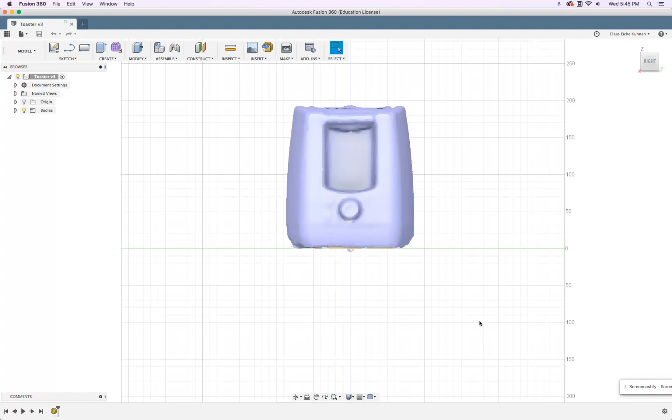In this project, I will show you the steps we can take to rebuild this kitchen toaster. We will take a look at the best strategies to create the individual sides, and then also the details like the opening, the push button, and the dial.

So let's get started. Step number one is, well, we need to figure out what would be the best strategy. Can we loft this one? Can we extrude this one? This is a nice study case to show you a different approach. We will create all the 6 different faces and then create the inner volume. Sounds abstract, I agree. Let's get to it.

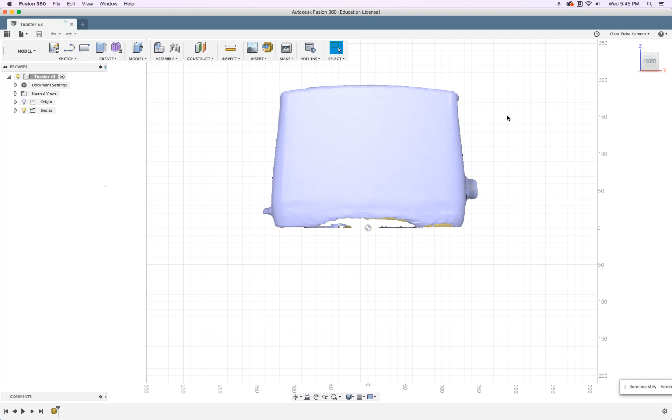We'll start with the front view. This is the easiest one. We'll create a sketch on this plane.

I'm also simplifying this design just a little bit. So from up here, I draw a line, maybe till, let's say, there. That looks good to me. And then I would like to add an arc, and I make the arc a little bit bigger, and the arc is also tangent to that line.

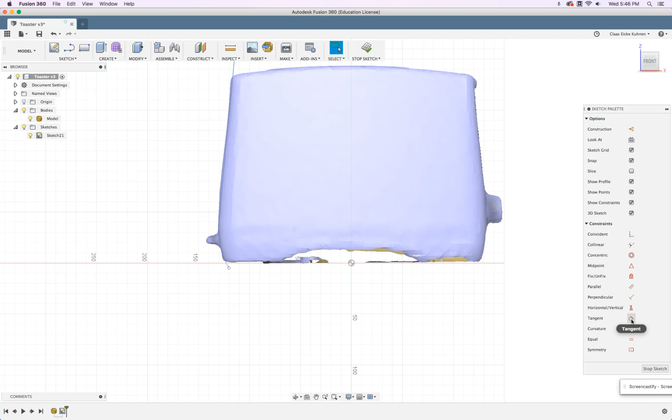In case you do not see that tangency, go to the sketch palette and create the tangency.

With the top point here, we can move this around. Here we can move this around. And you see, once we do everything, the modification of the sketch can be a little bit tricky, so just be mindful with it. But this looks pretty good.

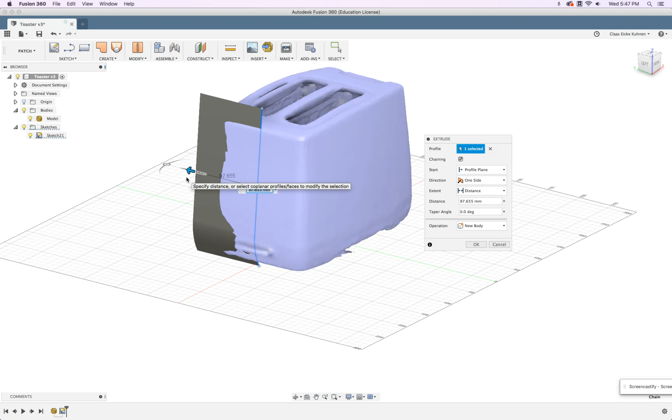Click Stop Sketch. And if we now go to Patch Mode and extrude the sketch, I have chain select, so both the line and the arc are being selected. I can extrude one side and I can extrude also to the other side. And you see that I made each side pretty big, and that's actually on purpose. I overbuilt.

Okay, so with this one surface done, I don't have to create the sketch on the other side and then extrude it. I can simply go to Create, Mirror, select bodies as the type. This is the body, this is the mirror plane. Along this one, click OK.

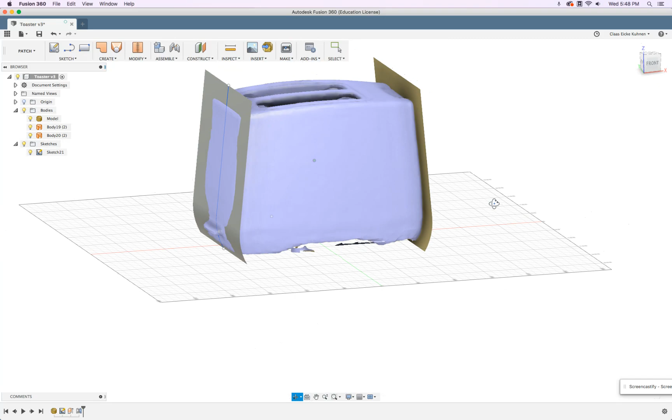Very good. Now I can see here I'm a little bit off, so maybe I have to move the toaster a little bit to the left. So let's do this. Here I go Edit, and then I will select Move, Body, select this one, and then just very gentle nudge it over, and I try to see how each surface there sticks through. Click OK. Click Finish.

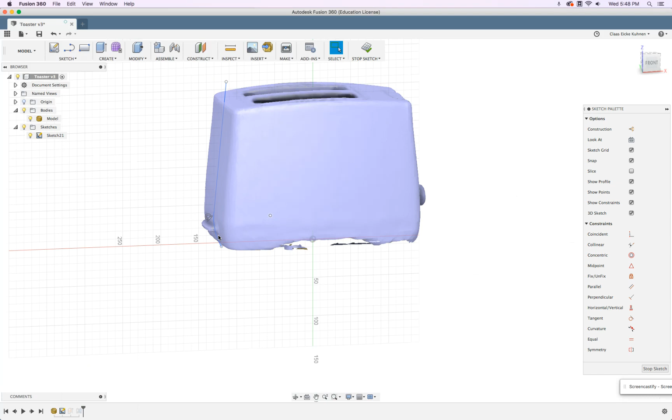And this is already a little bit better, which now means I can adjust my sketch. I select both elements, the line and the arc, press M, and then very gently move this to the left, click OK, and stop sketch. And now the surfaces, yeah, they're much better. Very good.

To help me navigating my scene, I'm going to hide these two bodies. Then I will create a new sketch on this plane. In case also sometimes you don't see these planes via origin, we can turn them on and off. And I would like now to create an element there too.

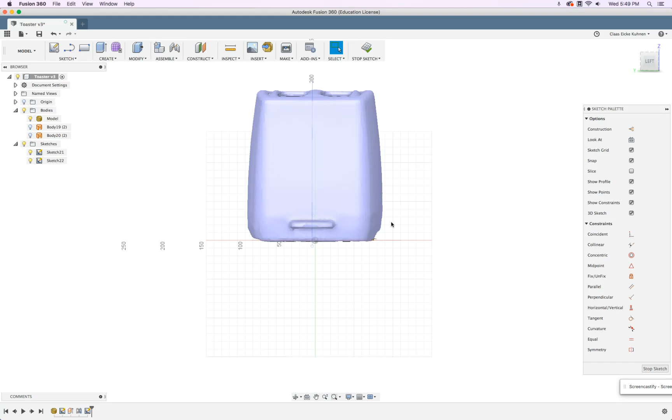So you see this is not a line, but it's slightly arced. And then here we have that arc. I want this arc point to be also in this sketch, so these, from both sides, these arcs start at the same position. So I will project maybe the top and the bottom, and also here, this top point. Okay, very good. Because now I have the height position, the length for the line, the length for the arc.

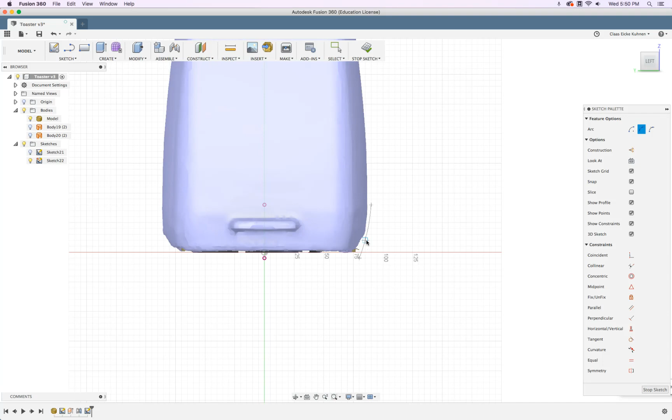Then sketch 21, in my case, I can turn off, go to the left view, and here I will just draw myself preemptively an arc, and then here I will create a spline. Okay, the arc and the spline should be tangent there, and then we have to adjust the height positions.

There, you see we have the horizontal constraint. This is all set, very nice. Now we can move these elements slightly in. I have this snap to grid turned on, so I will turn this off. There. What's the radius here? 142, it looks. Okay, very good. Okay, nice.

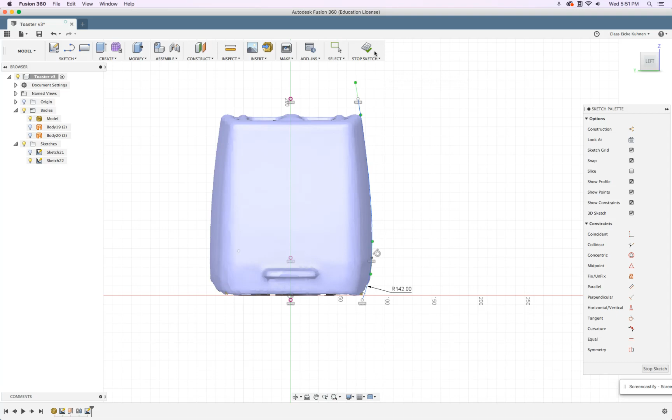Now with this done, I would like to create the surface, but as you can see, while this is kind of flat, this, or better seen from the top, this is arced. So, how do we do this?

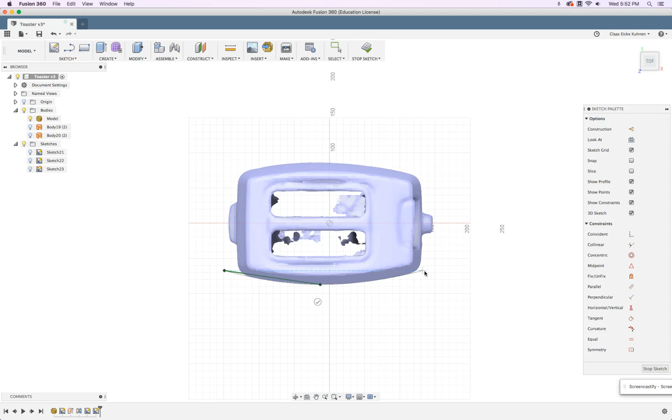I will do the following. I will create a new sketch. Somewhere just on the ground, go to a top view. That's good. I can hide these two. Then I select the spline command, click somewhere, click somewhere, click somewhere. Whoa, why did this? Oh, there it is. As you can see, the sides are slightly different.

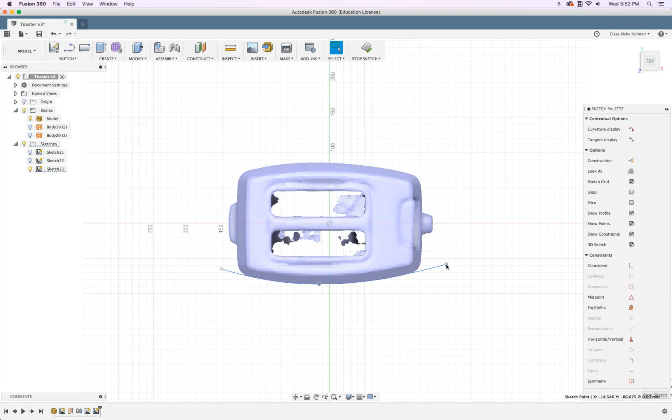So I can just draw actually the spline and then position these points as needed. There, very good. So this is actually the path or the rail I will sweep this along. See, they also don't touch each other. That's not a big deal. Go to patch. We go to sweep and say these two lines sweep along this path. Very good.

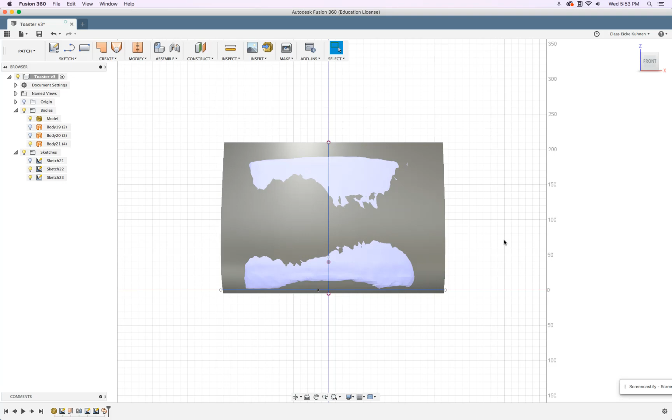Let's take a look from the front. You see top and bottom are nice horizontal lines. These vertical lines are slightly arced. That makes sense because you can see how this is angled.

Also here now we do a mirror again, so this we mirror along this face. There we are. So left and right and front and back, we have the surfaces, just not the top and the bottom.

So it's up to you now how we want to structure this. Let's say we call this left, and then this is front. This is actually front sweep path.

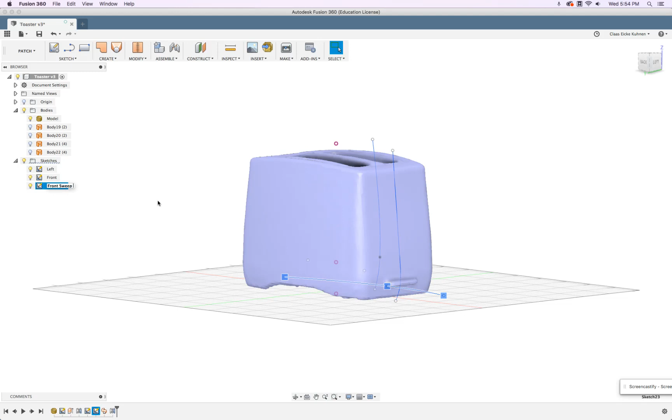I could create a new sketch and then add these elements in, or put this into the left. In the previous project, I mentioned try not to have too many sketches because then things can get confusing. In this case, however, I will separate everything into individual sketches, so it is easier for me to navigate. So I turn those off, make a new sketch.

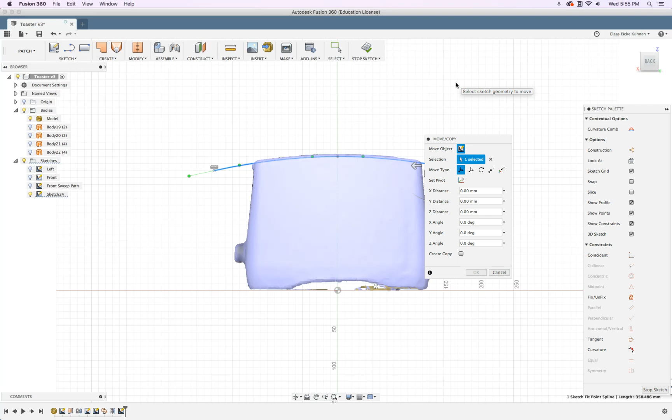Here I will create a nice big spline. Let's say these 2 points I would like to be horizontal. I can use the grid to snap this to the grid if I want to. And let's see, when I bring this one up or down, I can select the whole thing with M, move it a little bit up. I'm trying to find that arc.

Very good. If I want things to be more symmetrical, it's a little trick. I draw a line from the midpoint of my sketch down. Again, I press the L key to draw this line. Escape, select the line, press X, so it's a construction line. That helps me.

This midpoint I want to be vertically aligned. And then I click symmetry, this point to this point, be symmetrical along this line. There, escape. And there you see now how this line deforms. Very even. Now this is a perfect centered arc.

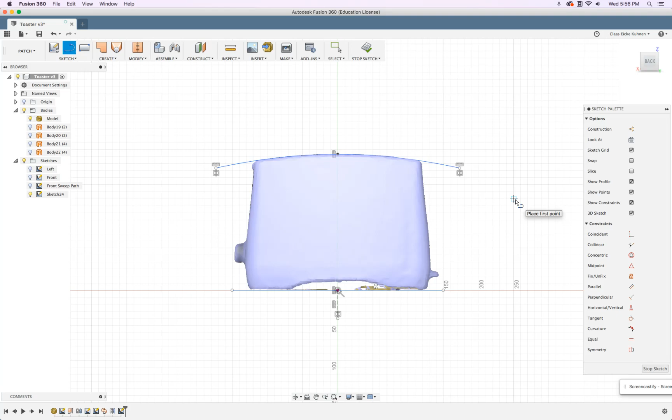Here we have another arc. I will, for the moment, ignore this arc. So I just draw a long line, and then later we will come back to that particular detail. Okay, so click stop, click the lines.

Then let's extrude these out, also here symmetrical. And when I rotate around, I make sure that all surfaces are somewhat intersecting each other, so there's no gap, which we have.

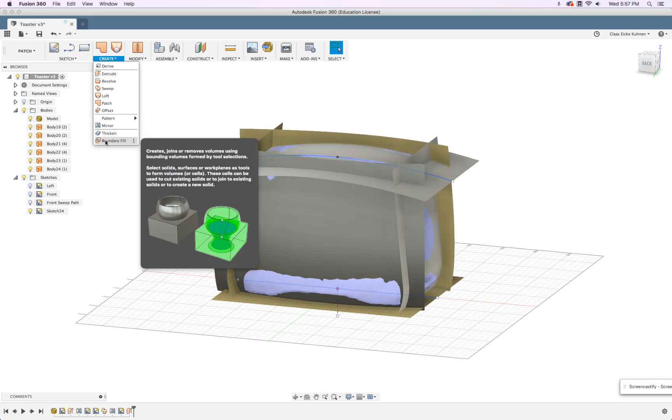Perfect. Click OK. Now, new introduction to a tool, boundary fill. So with the boundary fill, you can select multiple surfaces, and then it will keep the surface or the volume of the inside. That's the reason why it's called a boundary fill, because all these 6 surfaces create a boundary. So select that tool, then we select all 6 faces.

When done correctly, you should see this green thing pop up. Click select for the cell. That's the cell we want. Clip. Oh, did they add it? Remove tools. Click OK.

Finally, they did it. I complained about this a lot in the past when not having this option. Now we had the volume and all these surfaces, and now I needed to remove all these surfaces, which we can do, but then we have these entries here, which is terrible. So let's undo this and edit feature again, remove tools. Thank you, Autodesk.

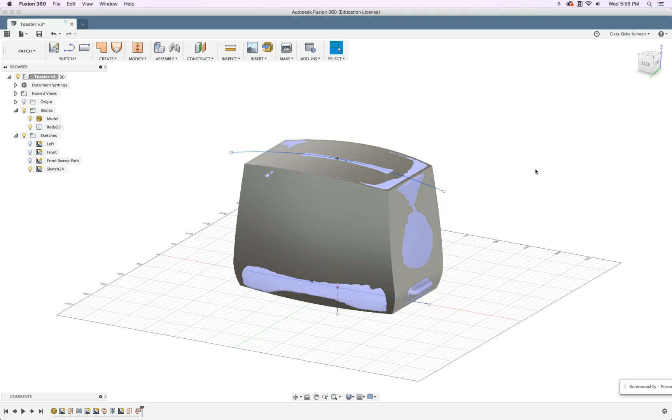That looks pretty good, don't you think so? So we have a nice flow. The cool thing is at this point we have a mass volume. So if I move this one down or bring this up, you see we can very quickly adjust the design.

So this maybe we can call top bottom trim. That all makes sense, very good. So what do we do next? At this point, maybe we could think about the edge rounding for a moment.

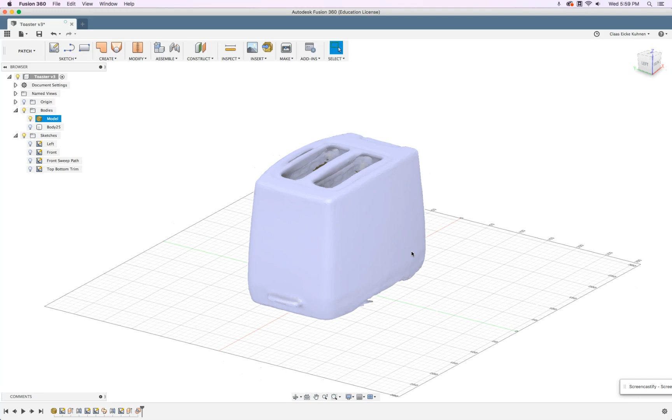If I zoom in, you will see that this is slightly rounded. This is more rounded. There's a particular fillet tool. Sorry, not fillet tool, fillet option. Click fillet, select this edge, and then instead of constant, we select variable radius.

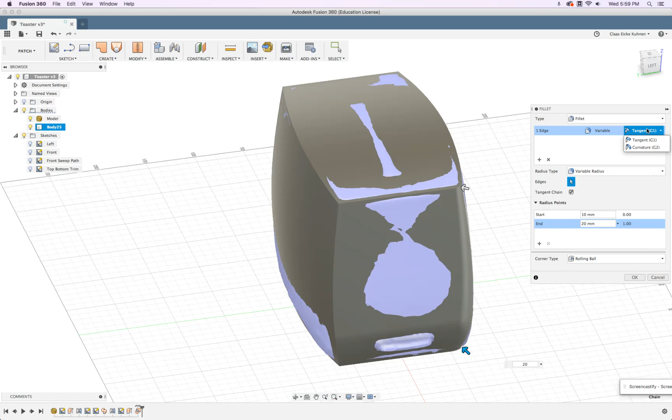Now we see now 2 arrows. Let's move this one in a little bit and move this in a little bit. So here maybe 10, and for the other one, and say OK. Good. Now we have to do the same on the other 3 edges.

Now I have to memorize 10 and 20. Well, what happens if this one edge we want to adjust, then we have to adjust the other 3 edges. So let's go to change parameters. This is kind of like a spreadsheet that shows all the different commands or features we are capturing. And there's the fillet 20. So this one, see fillet 20.

Start radius D114, 10, and radius D115. And radius D bottom. We can actually give those names. Click OK.

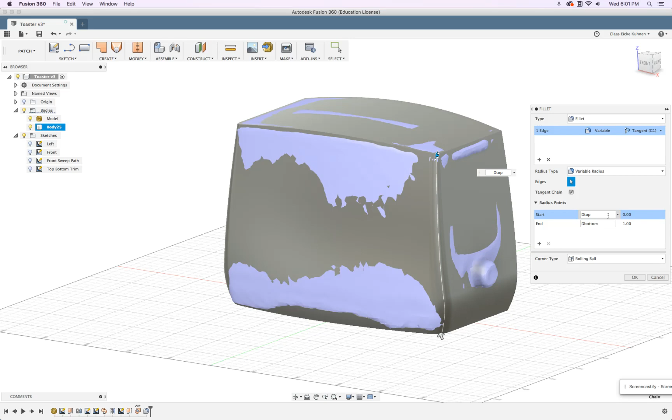Now let's go back to fillet, select this edge, variable radius. The end is actually the bottom, and this is the top. But by typing in the name, it copies that value from the spreadsheet. So here again, this is now start, and here this is actually the top, so I have to be careful. There, this is the bottom.

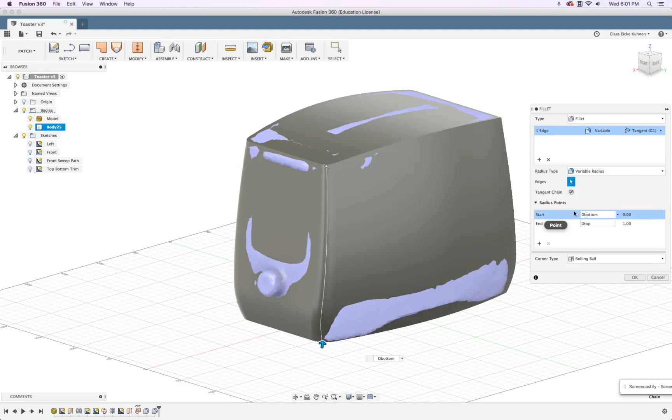Okay, let's do this one more time. So pay attention to the color of the arrow that tells you which one we are working on. So the bottom, and this, you see when I click into this, this arrow lights up. This is the top. Very good.

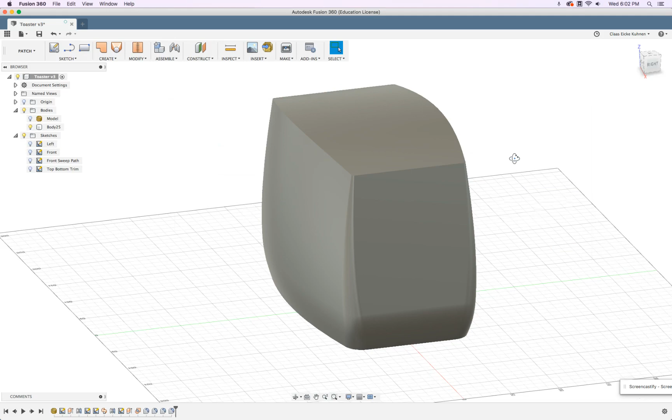There, very nice. So if we now go back to the first fillet, or we could even go to change parameters and say this one here be 3. Click OK. Now you see all edges have the radius of 3 at the top. 10.

Much better. Okay, but is that really 10? I don't know. Let's maybe make this 15. So this one I make 15 and 25. Okay, very good.

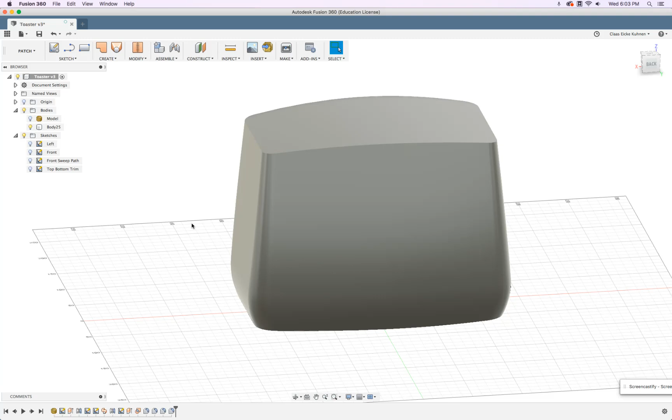I did not assign a G2 fillet yet. G2 takes more computational power, so for the moment I just simply leave G1. That will run faster. Let's go back to fillet, select this one.

Here we might say constant radius and 10. Okay, because this one I made 15, now I can make this 10. I can't make this 15 or 20 because then the radius would get too big.

You can see that this, where my mouse is, this arc is getting smaller. So this is 15, and then with this edge 10, the result here will be a really tiny one. If I set this to 15, see there, this is like super tight. This looks terrible. If we go to 25, we have like a corner point, so this is even worse. So let's go with 5 or 10.

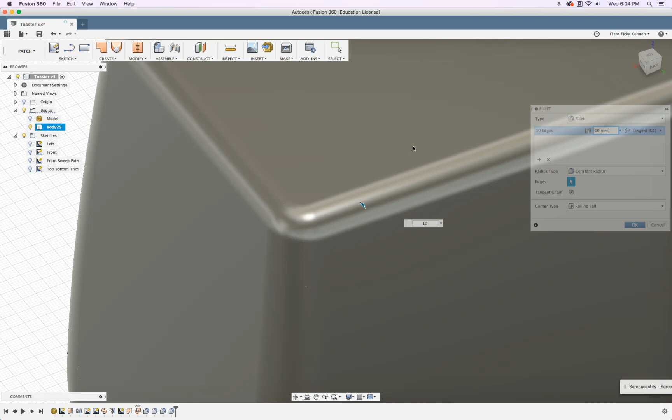Okay, nice. Let's maybe turn on this so we see the edges, how everything looks pretty clean. Very good.

Now it's time to create actually, let's start with something simple, the dial. So how do we create the dial? It's a horizontal cylinder. More or less, it's actually a revolve object.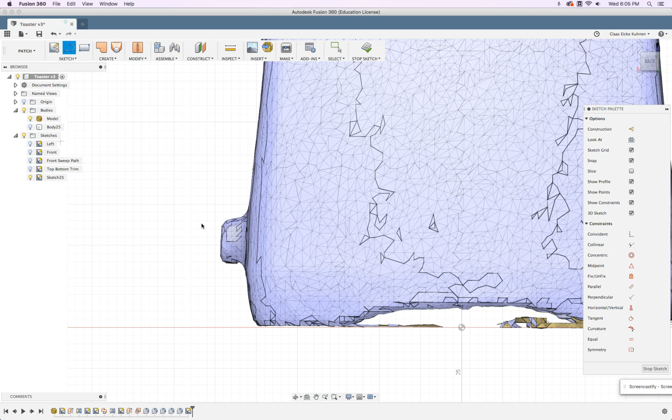So I could make myself here a new sketch, and then say when this is a line, so I try to find the height at the top and the bottom point. Where is my midpoint? There. Let's go inwards. Okay, a little bit up, a little bit down. And then move this one to there. Let's move this one to there. And there's actually our dial.

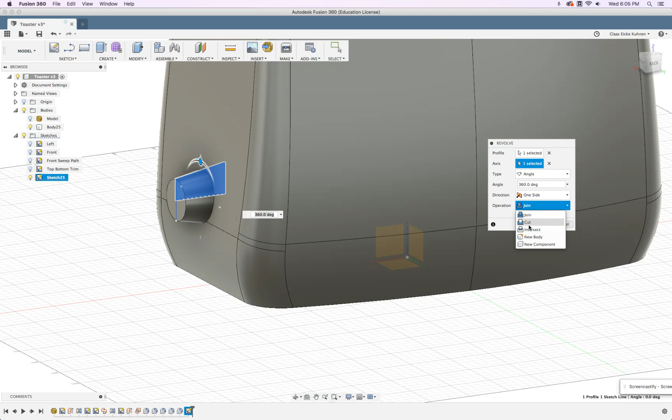Very good. Okay, now that's a revolve object. And revolve this one. Whoops. Along this edge. Not cut, not join. We want this to be a new body. Okay.

And let me actually grab the toaster for a second. Okay, and the inside is arced. Good, inside is arced, so this is actually not flat, it's slightly domed. So that means we have to go back and adjust our sketch here.

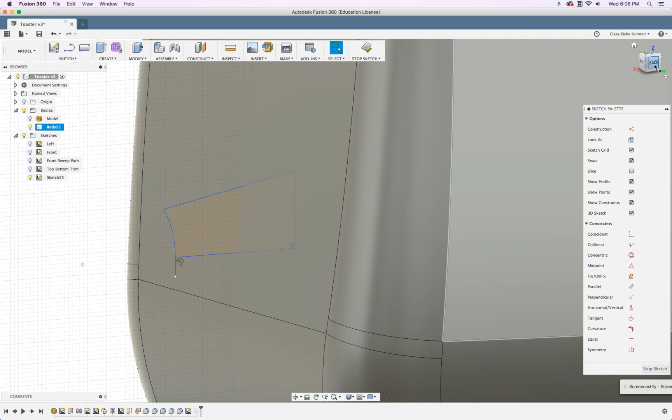This line I will select and delete. Then I will draw a line down. Okay. And this one I might bring over to there. And then I will create an arc from there to there and make this, as you can see, tangent to this line. So let me bring this a little bit to there so it's not so extreme. Very good. Stop sketch. Ah, there we are.

Very nice. Then we can fillet this a little bit. Very nice. And then we also have a little extrusion there, a little hollow. Okay, good.

So what did I mean there with a little bit of a detail? Let's rename this button revolve or dial there. And...

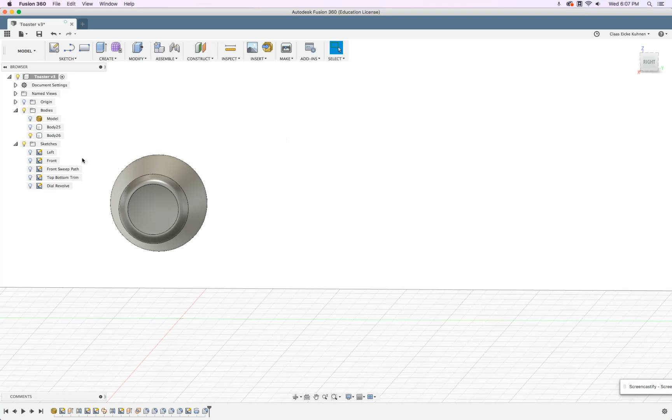For setting the temperature, you need to have some sort of a marker somewhere. So something either we cut out or we add to it, and they actually have something added to it. So we can do kind of like the same.

There, okay, good. So give me one second, I want to double check something. Okay.

So you see this up here is a longer edge, this is a smaller edge. So we can only design this detail as long as it is here. So it will sit actually on there.

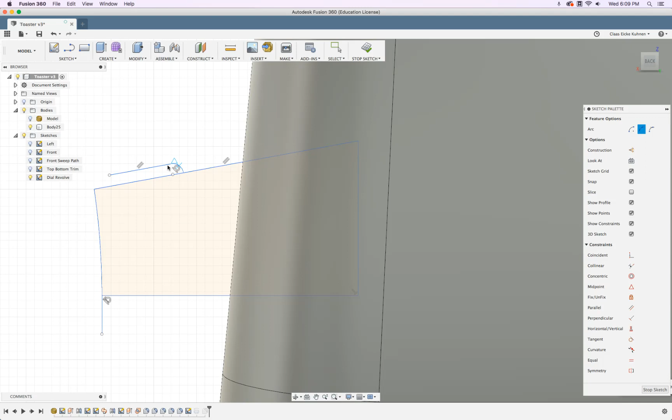We can put this detail into the dial sketch. Let's go edit sketch there. I will create a line, make it parallel to this line, and then create an arc, tangent. Move my mouse down. Yep, that should be good.

Stop sketch. Now I have to move this arc more to there. There are some issues happening. You'll notice by dragging stuff, my sketch got corrupted.

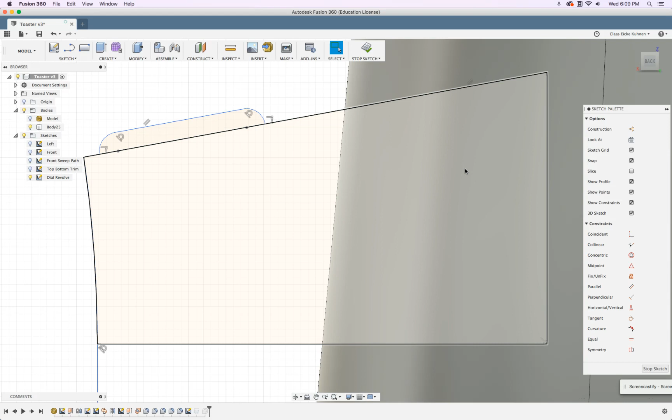Let's go back to edit sketch. This line I fix now, so it can't move anymore. This arc I move onto the green line, you see there's a blue cross. I do the same, or via a coincident constraint I can do this. So I'm creating a coincident constraint, which means this arc's center dot got glued onto this line. Now I can slide it up and down. It makes it a lot easier.

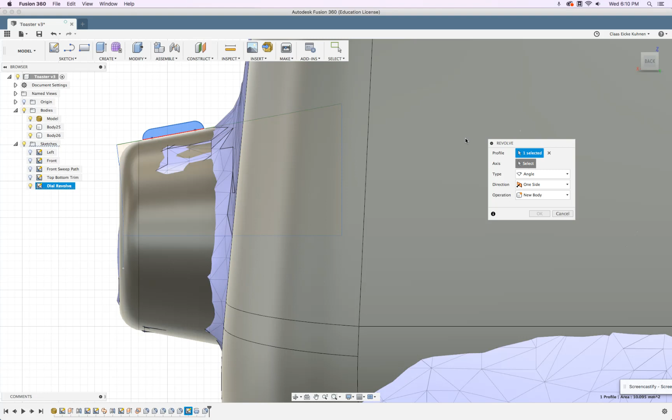So this one here I just bring to there. Good. Now I can move my mouse down, so it won't collide with there. We can now do a revolve, this one along this axis, and in this case now we join this. See? Now we have a small finger element that will help us understand where the temperature element is. Very good. So that was kind of like the element for the dial.

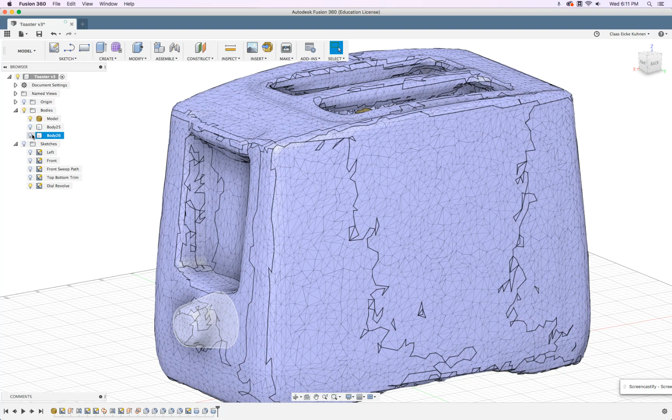Let's take a look at how we can create the push button, so we can press down and then slide the toast into the toaster and start the toasting process. Take a look from the top.

This in the sketch is a little bit more difficult to see, but this is a slight arc. These are more linear lines. This actually slides down here along a line. There you can see this is a line, here this is an arc. I don't know why they didn't do this exactly the same, it's kind of inconsistent.

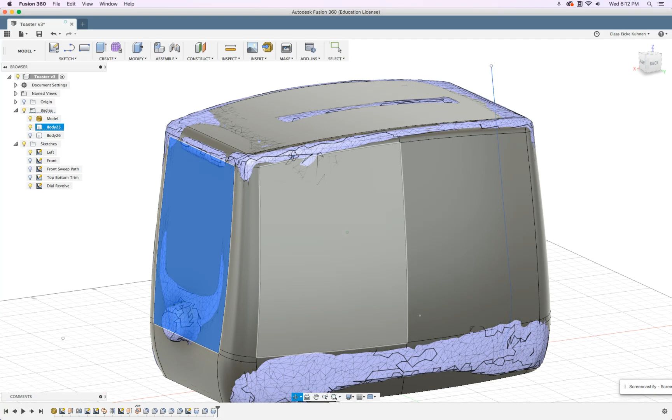So how do we do this? On this surface I want to have a line for the path. I'll show my sketches on the left, so I have the sketch here actually. Unfortunately not there, not a big deal. So I'll create a new sketch in this case, there, so this is running through it. And then I will intersect this face with my sketch, because that creates this line. I can call this one button direction.

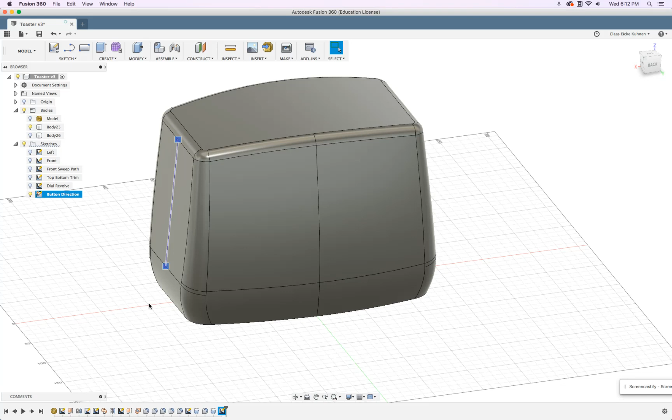How do I now create that button? Currently this whole thing is still a solid part. So I will create a definition that describes the volume of this button, then create a volume and start cutting the volume from the main element. Okay, that sounds pretty abstract, so let me show you what I'm talking about.

We'll go to construct plane along path. I'll put this to the top, click OK. This I turn off, this I turn on. On this construction plane I will create a new sketch. In case you don't see that construction plane, make sure this is turned on. I can go to top view.

First, hide all other sketches. There I draw a line down. Escape, select the line, press X. This is my mirror line. Then show this, here we can create an arc.

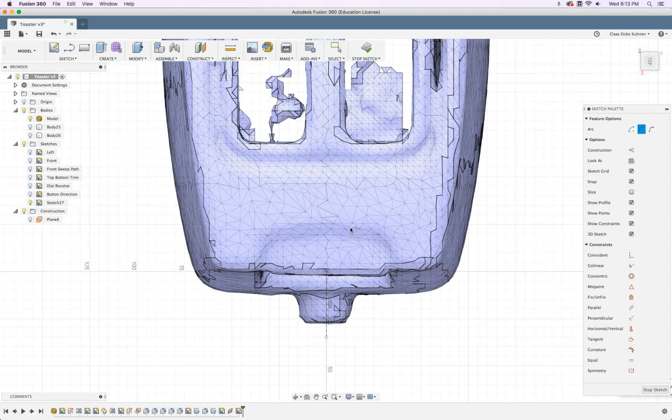Now this arc I want to be perfectly symmetrical. First thing, horizontally and vertically constrain the dot of my arc to the sketch center. Very good. Then these two points I also make horizontally constrained, so you see they run perfectly the same way. Then I can draw a line down and a line down, make these two lines connected. This is horizontally aligned, and these points I want to be symmetrical, so symmetry, this point to here.

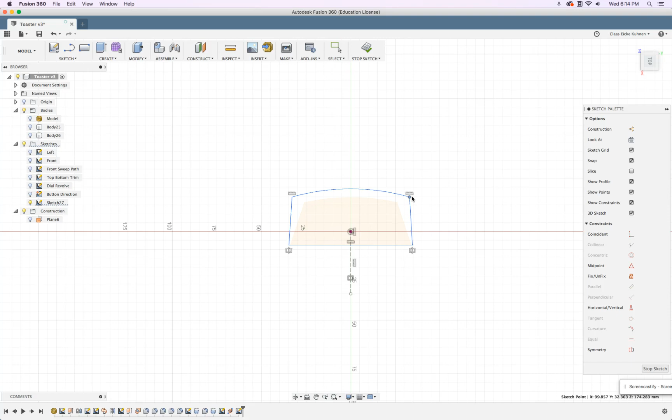Escape. Now you can see I can adjust this, I can adjust this, pretty awesome. Which means now I can push this one to there, I can push this one to there, making this somewhat bigger than needed. That's good. Okay.

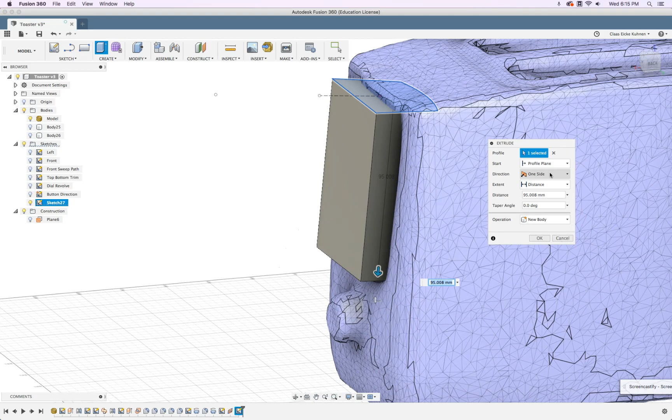Very nice. So show me my toaster. I will go to create, extrude this one down, but I don't want this to cut out yet, so we'll create a new body. This toaster I will hide. I'll just take a look at where my scan object is. I will bring it down to there, and it has to extrude on top too, so two sides in this case, and I can extrude this a little bit. Okay. So this is my object that I will use to cut this space out of this one.

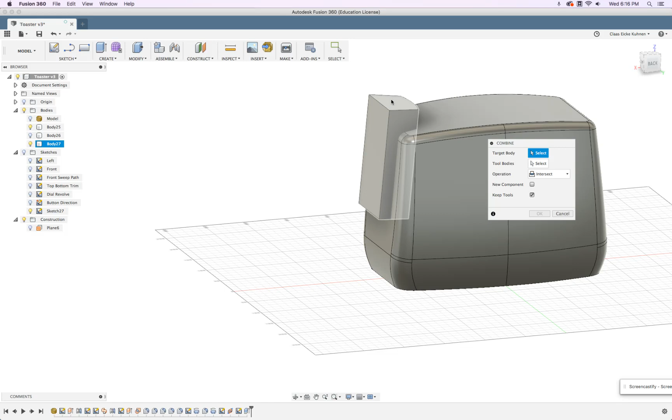So there it is, there's this tiny object. Now we do it in reverse: this is my target, this is my tool, but this time cut, and I want this cut tool to maintain, so keep tools. Click OK. Very good.

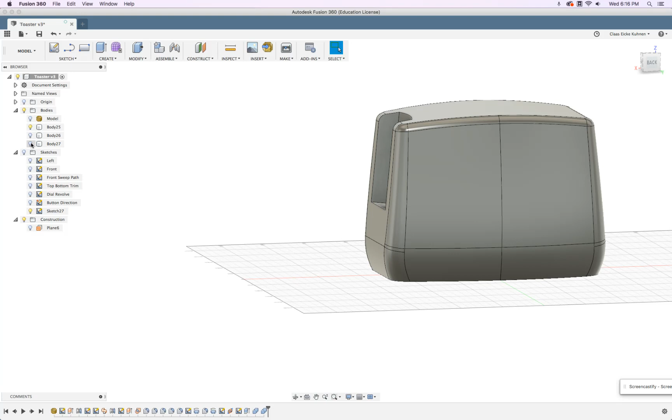Nice, there's one little problem. If I go here, you see that this is at an angle. That angle isn't good because that means it's actually going inwards. I'd rather have this face go up instead of going down.

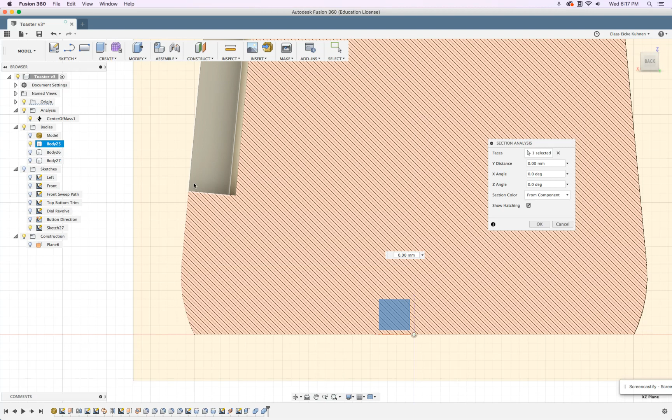Let me show you what I mean with going down. Nope, not center of mass, I want section analysis. Instead of going down, I would like this to go up. Think about dirt and breadcrumbs, etc. If this is at an angle, it can easily flow out. So to do this, we have to go back to this step.

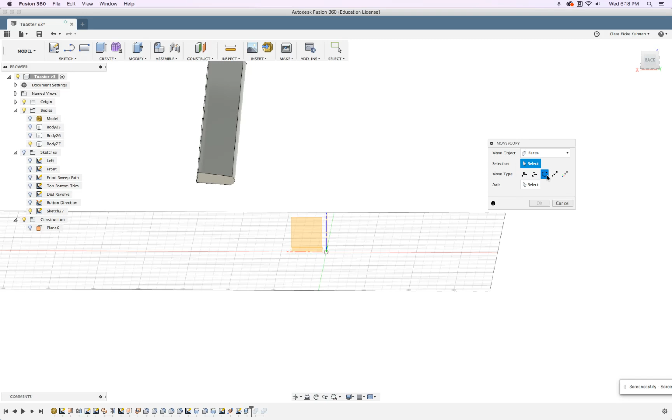And this face, I could trim or I could rotate. So let's do a rotate. We'll go to move, then rotate, face, and say this face rotates along this axis. See, by rotating it, I'm changing the orientation.

Let's say like this, that doesn't look too bad. Click OK. And then when we go back, everything is perfectly adjusted. Nice, very good.

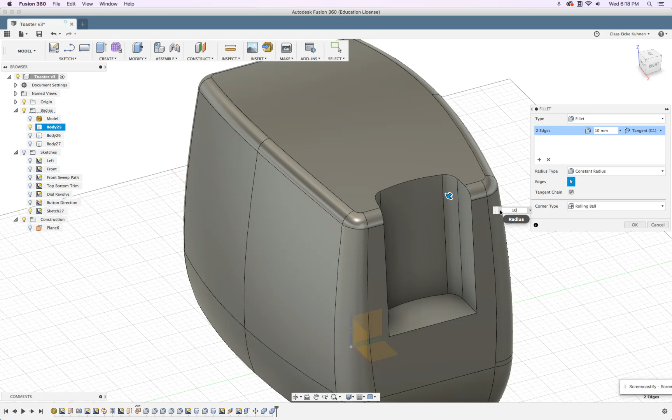Then we could go to fillet and say here by 10 or 5. Okay, 10, 5. And then let's do those 2.5. So 10, 5, 2.5. Very good.

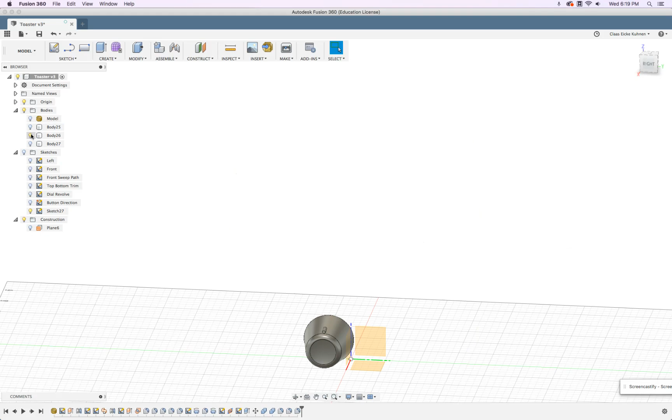I could actually go back to change parameters, by the way, and give these values logical names too, so in case I adjust these edges, then also the edges for here will be changed. I will skip this step. I'll just simply, in case I have to change stuff, bite the bullet and do this by hand. So we set this as 10, this as 5, and then this as 2.5.

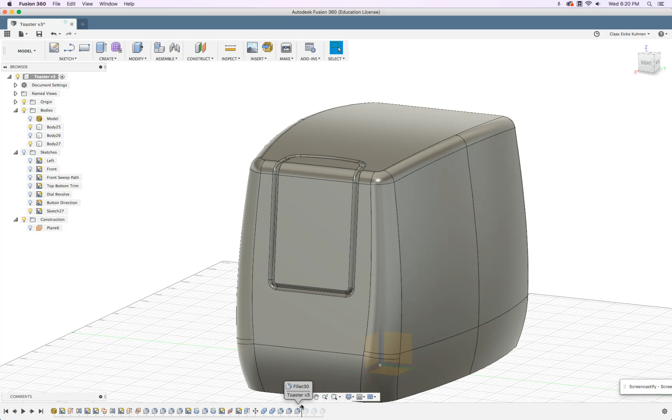So there we see how nicely there's a separation visually, but this button isn't really functional because it occupies the whole space. So what can we do there? Let's go back 3 steps.

And we press pull and move this one up. We can see actually that we can move this to there. Okay, let's go back. Yeah, this is better. Very good.

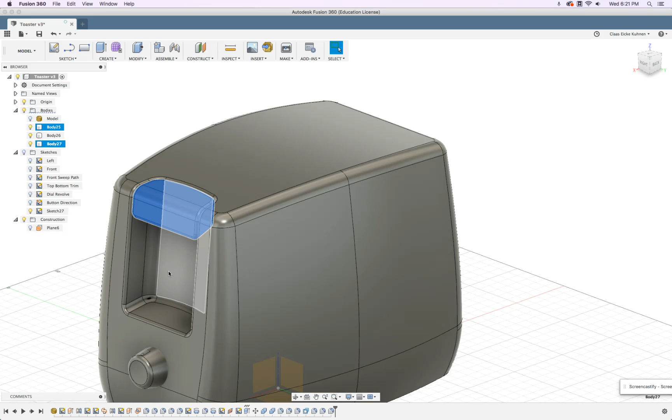Now, obviously, this face is parallel to this face. So when we move the whole button down, our fingers will be kind of in between. We only want to move this down so that we don't squeeze our fingers, so we can build in a block afterwards. But since this is a beginning exercise, we will simplify certain steps.

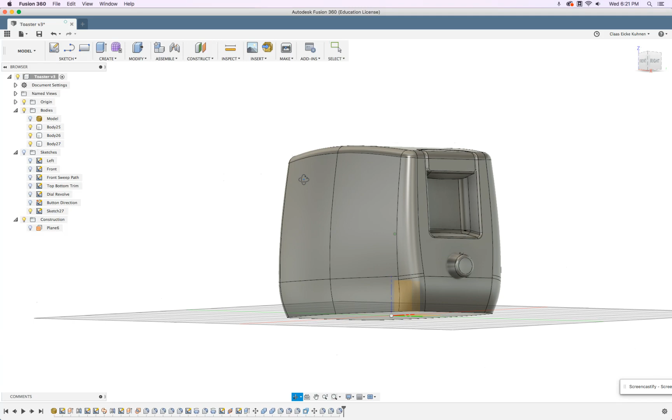But what we can do for styling purposes, to make this a little easier to understand, we do another rotation, this, and now in this case we just bring this one down there. Okay, zip, show this one. Yeah, so now we have kind of an opening. This edge will lay on this edge, and then there will be a small cavity for fingers in between.

Good, so far this all actually looked pretty nice. The next step is to cut the space on the top. But before we do this, we have to shell the whole element or whole design. And there's also this arc. So let's cross fingers that everything will work.

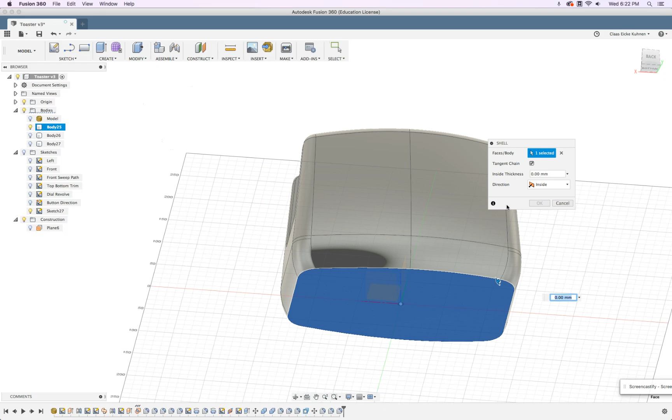Here's my main body, this is flat. And hello, shelling command. Let's go to shell and say this face we shell 2 millimeters. Click OK. So what does shelling mean? Let's do a cut section. There you see it actually created a perfect thickness and cored out.

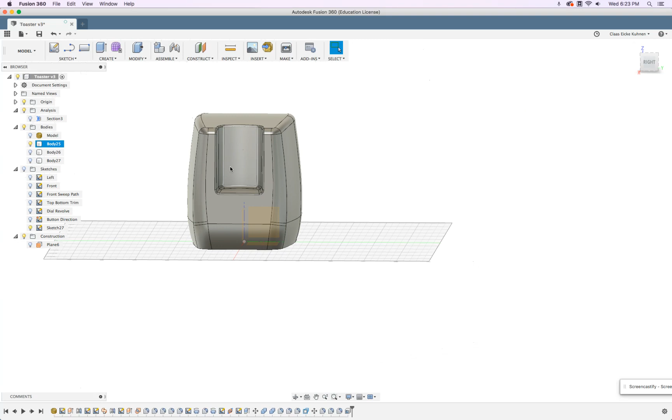It's like Halloween pumpkin carving for industrial design. Very good, nice, so this works. And now we can, for example, cut the top, and then also cut a slot for the button to go up and down.

Maybe let's do the button first, since that's what we worked on. So let's see here, this is the button. Here we have button direction, maybe button direction. Yeah, there we can do this. No, we cannot do this, you see the orientation.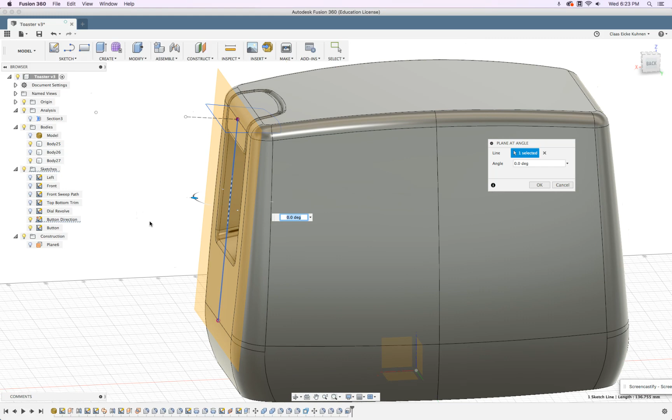Let's make another plane at angle along this line, 90 degrees. Yep, so this is good. Sorry, 0 degrees in my case. Then we create a sketch on here.

I'll hide all the other sketches and create a slot there. Center slot, center to center slot. Let's say from, it's probably somewhere there, to, I don't know, maybe there. We're just eyeballing this stuff to there. I push this maybe to there. Okay.

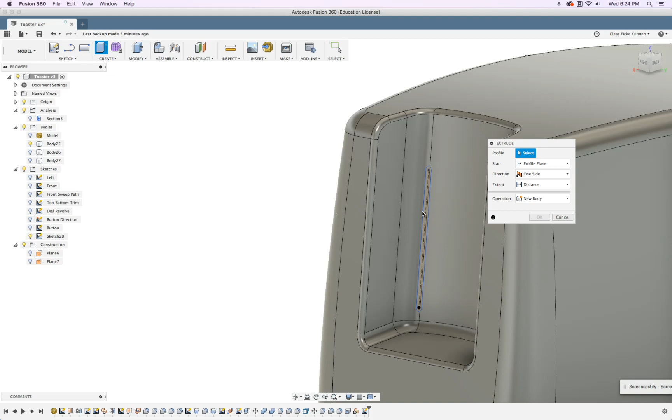This now can go. Then I will extrude this, zip, through the shelled surface, and there's now our opening. Obviously, all the other details are missing, and that's not really a big deal. We're more simulating how stuff could work. So we can call this one button slot.

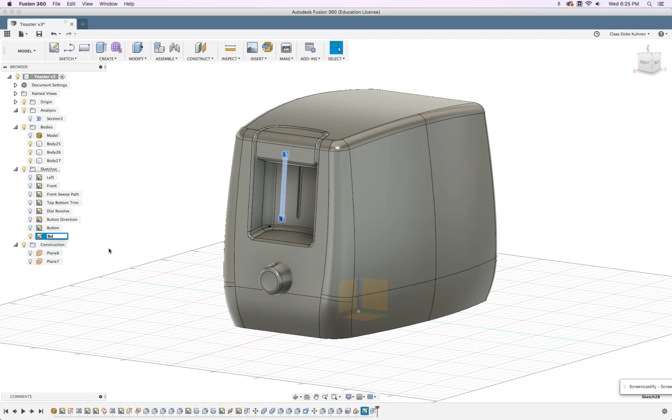The top part, how do we do the opening? We need to create a sketch to cut this open. We can create the sketch on the bottom. To make it easier to read, I create a construction plane on top, sketch there, hide all my objects, show this. So I see plus minus where that thing is, and that is a rectangle with arcs.

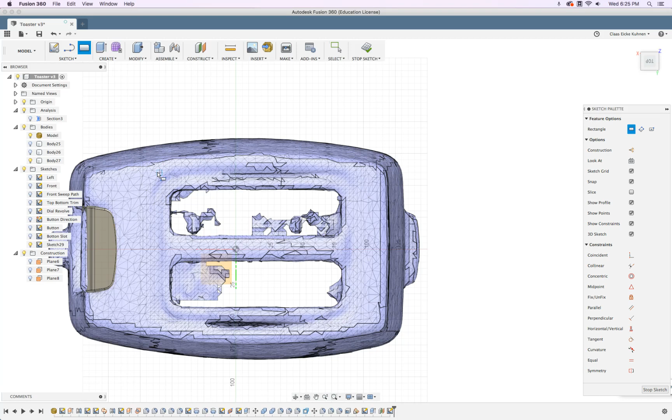Let's see what the best way to do this is. So rectangle, and then we will go fillet and say you and you, 20. Okay, let's do the same here too. You and you, 20. Fillet. See, I populated my shortcut menu.

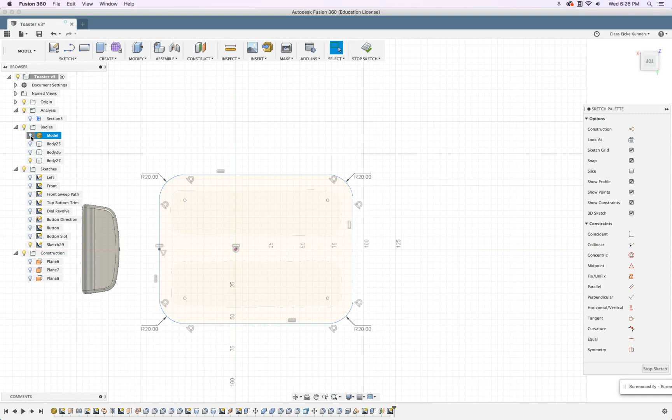Okay, now I would like this line to be centered. Easiest way: create a point on one edge to the midpoint, and then this point we make horizontally aligned there. Escape. So now we can move this up, bring this over.

Okay, good. So this is now a nice solid surface, which I can select and zoom, cut down. Very good. Is that the way how they build it? Yeah, that's the way how they build it.

And they also rounded this edge. So 2 millimeters is the material thickness, which means here we can give this a max of 2 millimeters, or 1.5. We have a very small sliver surface there. And there you see it's a nice detail. Does this look good? Yeah, this is maybe for my model.

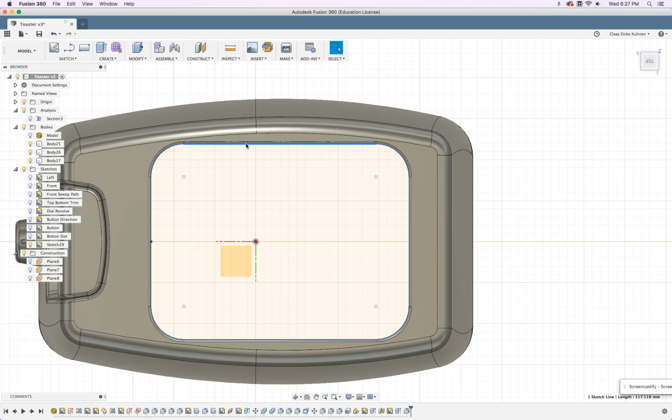This gets really tight, so this sketch, maybe I adjust it a little bit there. Sweet.

Okay, so for this part one, the last thing maybe we want to do is cut also an opening to the bottom. See here, there is this arc. Let's call this one first, toaster top opening. Okay, and do a quick peek.

That's the way how they did it. Okay, they built this. The design is somewhat different. We're really simplifying the design here a little bit. So this will not look 100% correct, but that's fine.

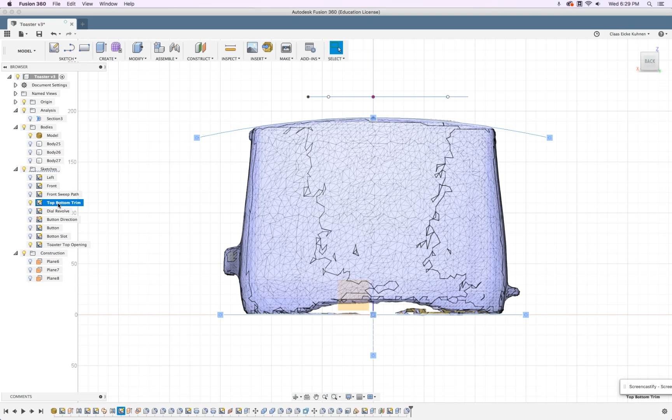Where do we have our side sketch? Button direction, dial, revolve. Here, there's a top and bottom trim. No, I go back to the sketch for the moment. And there I will add now this arc. Or I could use a spline to click, click, click.

I want this to be symmetrical to there. I want this midpoint to be vertically aligned to there. Escape. Now this I can move down. They are pretty much at the correct position. Okay, good. Stop sketch.

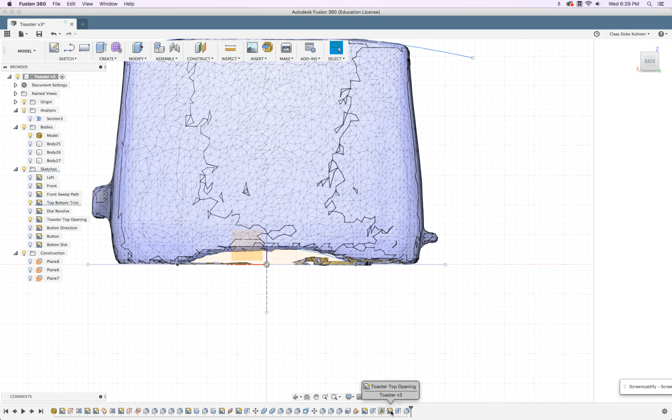Let's cross fingers, nothing actually in here should change. Good, everything is fine. So now we can actually remove this geometry. So the side, both sides, cut this out. And there you can see now there's the outer shell. Okay.

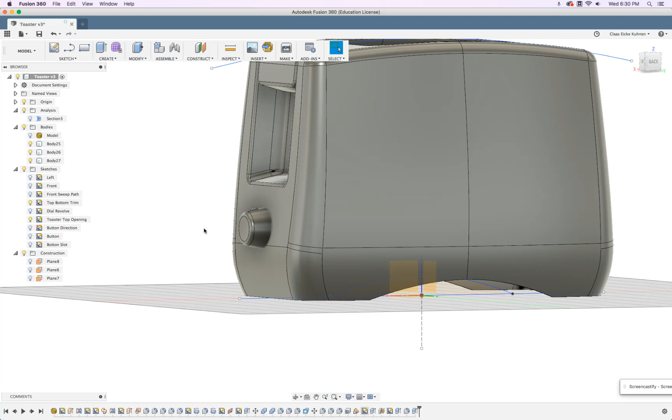The button right now is in there. That is technically speaking not correct. So we could trim if we want to and get rid of the inside stuff. So split body: this body split via these two surfaces. You can see I click this one and this one. Okay, there's that, there's that, there's that, and then one we could delete. But for presentation purpose really it doesn't matter. People won't see it, we can just keep it that way.

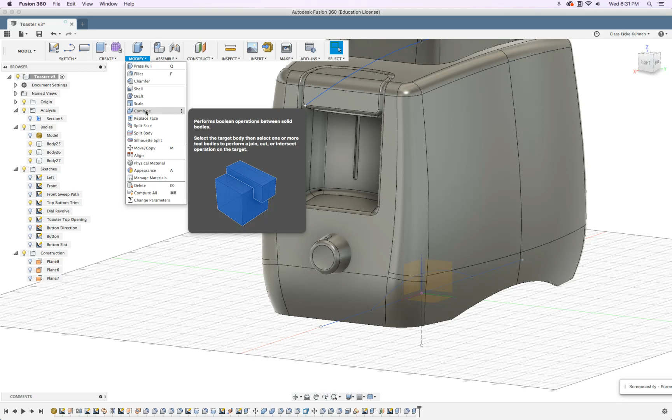What we however could do is create an opening in here so we could fillet these roundings. So let's rather do that. So combine: this is my body, this is my tool. Cut, keep. Very good, so you know there are these openings.

And for example, this one, we could just give a 1 millimeter rounding there. See, that looks better now. 1 millimeter is maybe too much, let's call this 0.5 millimeter, so we just see something. 1 millimeter was better. Very good.

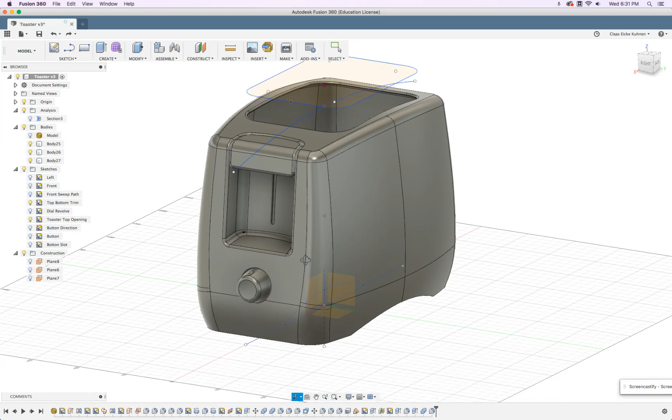So that pretty much sums up everything what I wanted to show you about how to model this toaster as a concept model in step 1. In step 2, we will create like a mock-up for the stuff that holds the toast, and we will try to close a little bit this lower area so it doesn't look so shelled.

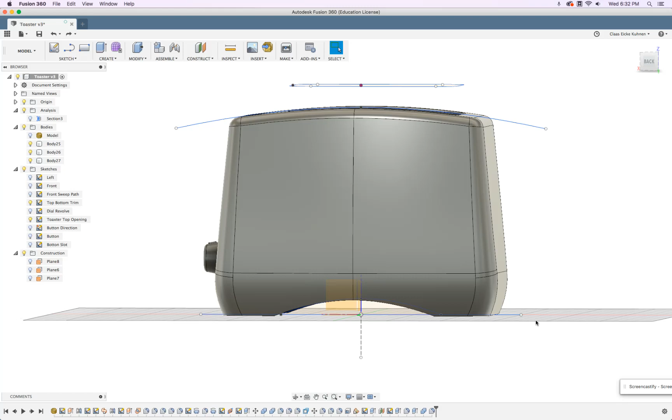If we look from here for rendering, this is fine because we don't see it. But if we are at an angle like here, then we can see through there, and that doesn't look necessarily very good. So we want to adjust this. And also, there are no feet or gliders, so we want to put that too. I will show that in the second video.